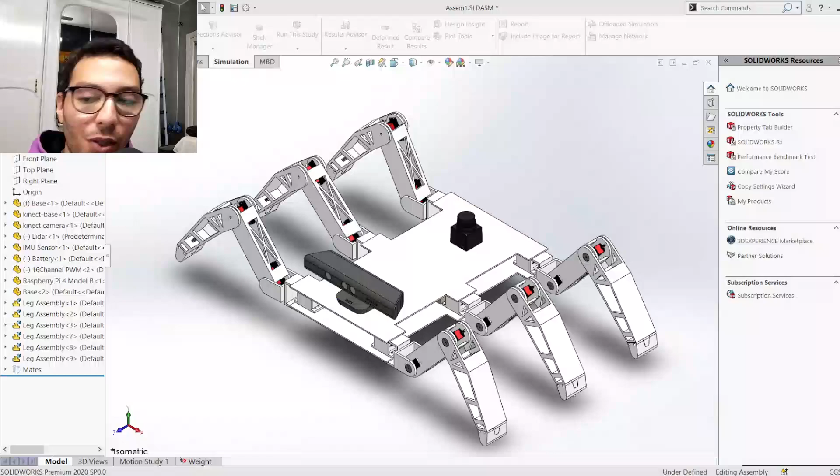This is what we stopped at last time. And from now on, I'm showing you the leg as well as the body we're gonna adjust. First of all, let's go to the leg.

So, in order for you to use a simulation in CAD, here's something that you need to know. Remember last time when we did fixtures for everything? So let me open another file to show you the difference. This is our actual leg that should happen, including the servo motors and everything. But each servo has its horn, and we have our ball bearings at the back. So this assembly contains everything.

If we do like this, this can move, this as well, and this. You got your 3 degrees of freedom in the leg. But this, as you can see on the bottom right here, it says underdefined. So if a system or whatever kind of thing that you're doing is underdefined, you cannot simulate it. So underdefined means it can move, as obviously stated.

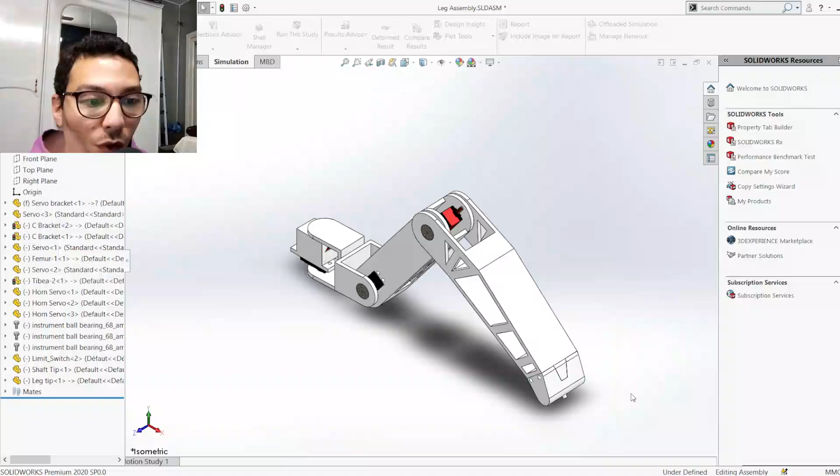But if you want to simulate something pushing the leg, and you want to see if the leg will handle it or not, logically speaking, if it can move, then if you apply some force, it will move. So it won't tell you if it can handle it or not. If you want to see if something can handle a certain stress or a certain force, you want to hold it down and try to bend it, try to twist it, try to force it, do something to it while it's stable or while it's standing still or fixed somewhere.

So in order for us to do that, I had to go right here and fix everything. As you can see on the left side, everything is fixed. The horns, I removed them because a couple of things with the simulation don't go well. I'll explain it. Give me 1 second, I'll show you. So if you go back here and we hide this, let's hide this as well. See, this servo motor, it has some gears. So the gears are very thin, to the point that this is the most thin part in the drawing.

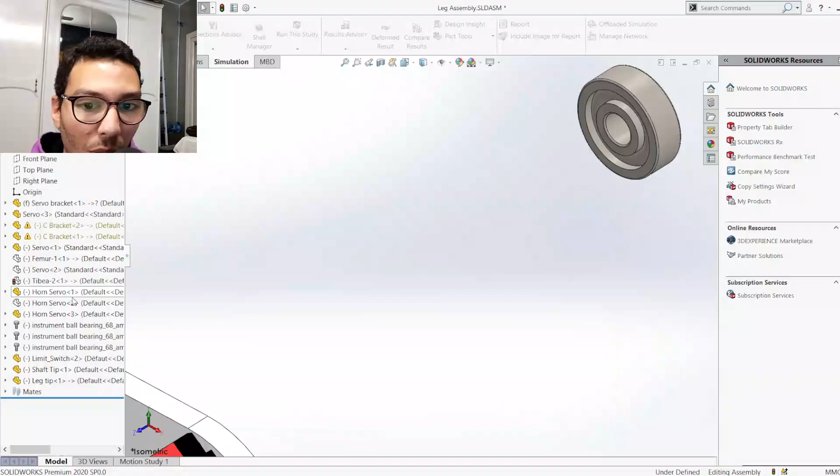As well as if we hide this and this, but get back our horn and look at it from the inside, it's also geared to match the servo. So these things are super thin. You see these drawings, the teeth of the gear? Whoever drew this, I got this from GrabCAD by the way, as you saw from the previous streams. Whoever drew this, it's amazing.

It's great for drawing and for me to fit things together and simulate it as what should happen in real life. But that is a problem if you want to simulate, because if we go back to our simulation, let me just put these things back. Alright. Cool. So let's go back here.

Now, if you wanna simulate something, first, as we said, number one, we're gonna fully define it as shown on the bottom right here. Now, the reason I left the horns out, because if we start a simulation, here's how to do it. On the top left, let me see if you guys can see that. There you go. So, on the top left here, it says new study. You're gonna go to this tab, simulation. As you can see, I'm hovering over it. Simulation, and then on the top left, you're gonna click new study.

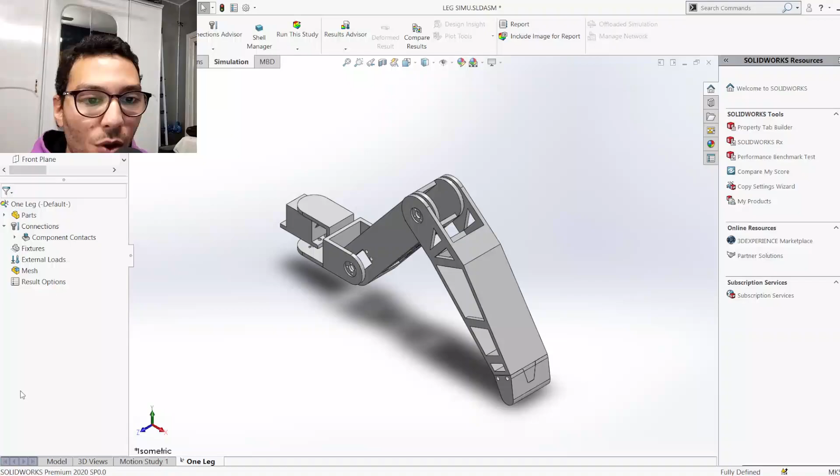After that, you're gonna name it whatever you want. It's a one leg simulation, so I'll name it one leg. Doesn't matter the settings down there, just totally ignore it. So now you are on a different tab on the bottom here. Instead of the model, instead of the 3D view or a motion study, that's not now at all, but this is going to be a fun part. Now you have another tab called One Leg.

So the One Leg is the study that you just initiated, and here you can adjust things that will not affect the main model. So if I go to parts, I can add parts, I can remove parts, I can, let's say, change material for something here, apply or edit material. I can do all that without affecting the actual model, the model here. This is not going to be affected.

So when we want to simulate, we go over here, and here is the tricky part that we needed to remove the horn for. Here you have to mesh this. So what a mesh does is basically you're breaking down these parts into very fine particles, so it can apply force to it, and instead of treating this entire thing as one block, it treats it as very tiny triangles.

So if you go to mesh and create mesh, here, mesh parameters, you see, you tell it what the triangle that it wants to consider is. So let me just put myself back here.

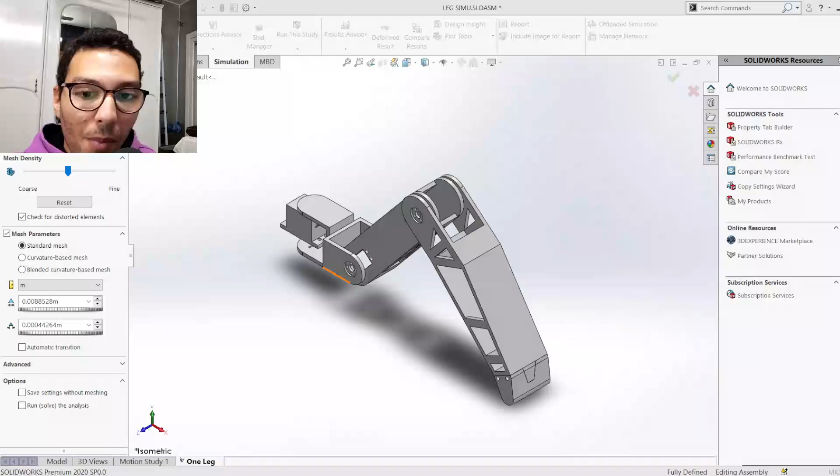Okay, so meshing here, as you can see, it deals with meters, so we're gonna have it as millimeters. Now we want to mesh this to be 3 millimeters. That's a nice thing to have, because here, this is the issue with the horn. You see, remember when I was drawing this and we said this is gonna be 5 millimeters thickness.

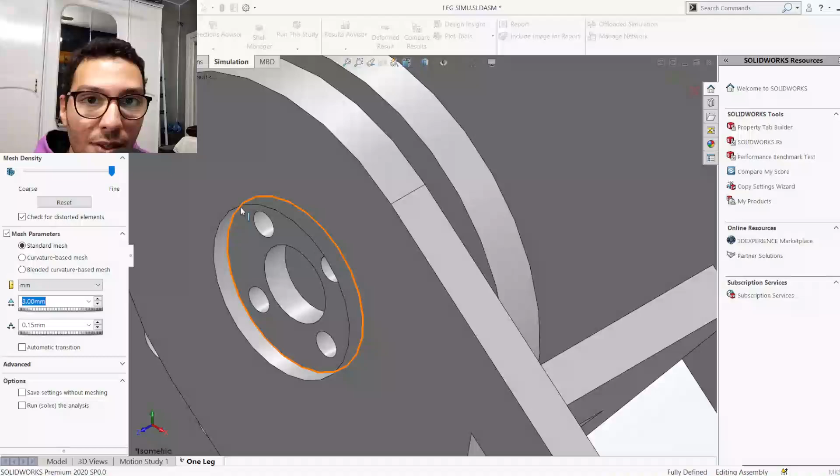If I had it as it was before, 8 millimeters, it wants to divide this into small triangles that are 8 millimeters thickness each. It cannot do that because it's 5 millimeters thickness only. It cannot put a triangle that's 8 millimeters wide inside a 5 millimeter part. Now, the issue is, the finer you go, the harder it is on the device to handle it. That's why people usually go somewhere here, which is, they just reset it, it goes to 8.8, and the tolerance here is like half a milli or something.

But basically, if I try, let's say, doing 3 millimeters, as you can see, it goes to fine instead of coarse. So even if I go this fine, if I had the horn or the servo motor present, it is way too thin. It is even less than 1 millimeter. It might even be less than 1 micron, which is like times 10 to the power negative 6. So now let's try doing it on 3 millimeters and see what happens.

It is trying to simulate, but it's dying a little. I mean, it's trying to mesh, not simulate, but it's still dying a little. So I'm gonna close this actually, because I have 3 SolidWorks tabs open. Yay! It did the triangles. First, I'll show you guys how it looks, but let me close this first. Oh god. Let's also close this until we need it. Oh my god, it's dying on me. Okay.

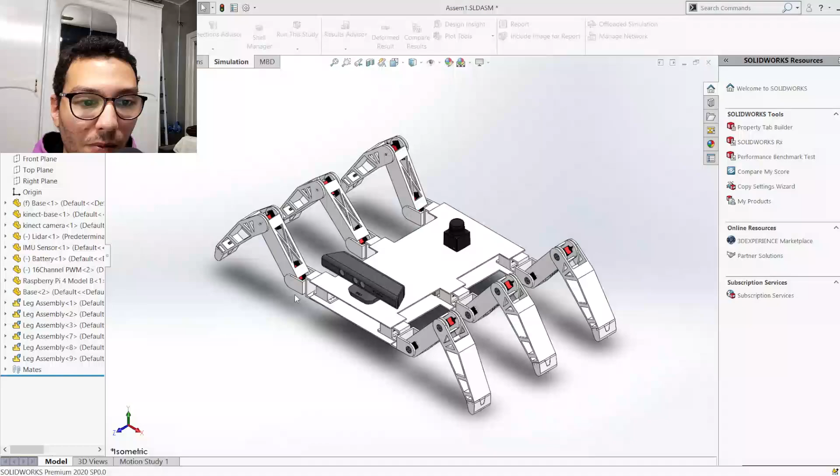Alright, now back to our simulation. If we go back to our one leg and redo the mesh. So create mesh. We did it as 3 millimeters. Now let's mesh. Alright, so now you can see what it wanted to do here. So it wants to put triangles inside of here.

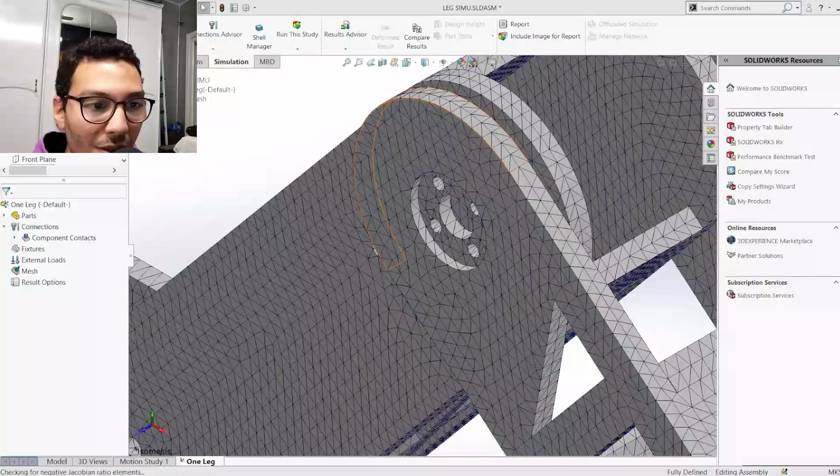As you can see, we couldn't have done it with 8 millimeters because this thickness is 5 millimeters, as well as all of the grooves, everything here. This entire thing is 5 millimeters, and this is a part of it. So let's say that this was like 3 millimeters or something. Inside of these are all 3 millimeter wide triangles, and so on. So it treats it all as small triangles all beside each other, and then we do this.

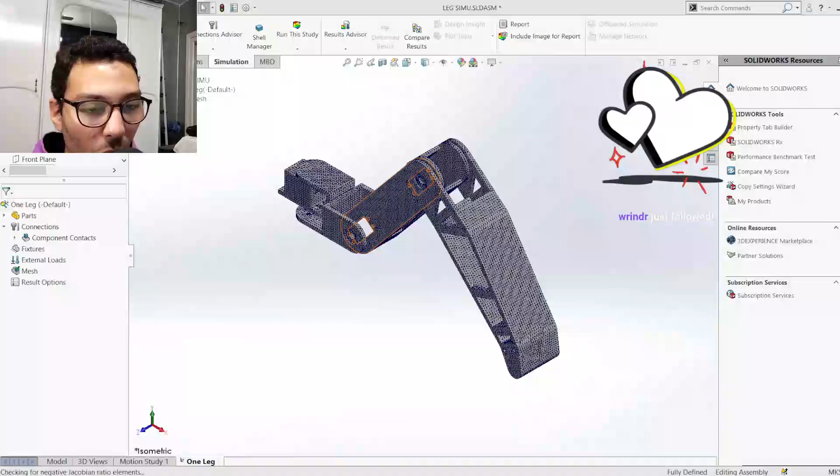After you mesh, you want to tell it where it's fixed. So this robot is fixed as this bracket has a servo motor inside of it, and this motor is attached to the body. That's what's causing the weight, that's what's causing the force. But this entire thing is stepping on the ground, so it's fixed on the ground here. So if we want to fix it, you're gonna go to fixtures at the top, or at the bottom here you can see fixtures. So we're just gonna go to the top here and say fixed geometry.

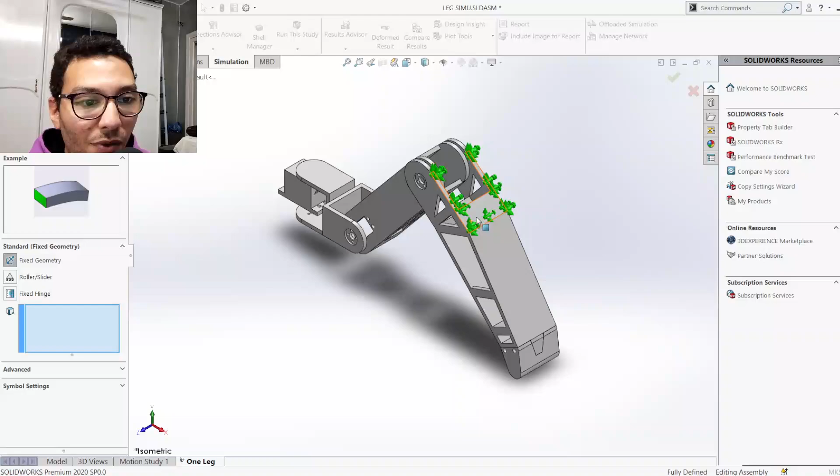Alright, so we want to fix it at the bottom as we said. As you can see, if we hover on something, it tells you that this face is gonna be all fixed, meaning it's all on the ground or it's all clamped or glued somewhere. So as we said, this is gonna touch the ground here. So this is our fixture. This entire body and leg is gonna hit the ground here. And if you push the ground, it's not gonna move. So it's like it's fixed. And let's say yes to that.

Now, technically, what we want to do is apply our force. As you can see at the top here, external load advisor. You can apply a force, a torque, so it's like twisting something, or some pressure, apply gravity itself, or external load advisor. It's like a tab that will show you how to deal with these things. A bearing load, centrifugal force, temperature, and so on.

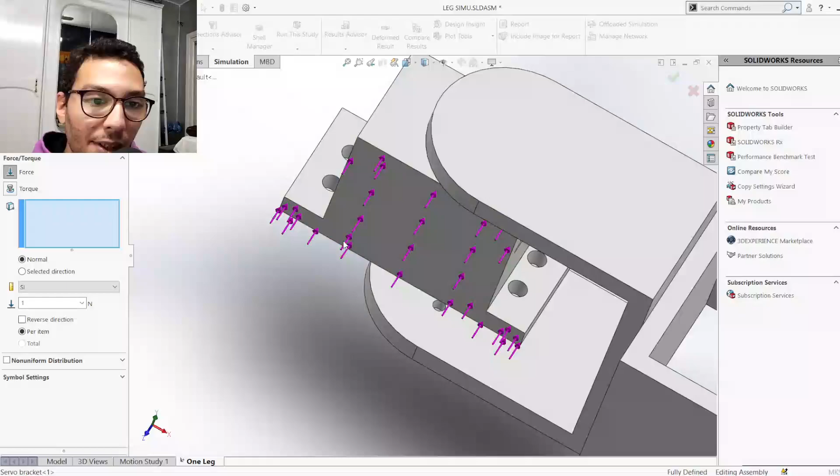So we're gonna go to force, and then here is the tricky part. Technically, this bracket is held onto the servo motor, which is held onto the body. If the body wants to fall off, so the spider is standing on its legs here as we fixed it.

If the body wants to fall off, it will take the servo motor with it, as well as the bracket. So it's pulling this entire leg from the screws here. So this is what's causing everything to try and fall down. But if I apply the force inside the screws, sometimes it doesn't work. So we're gonna apply it around here. Let me show you first how it doesn't work, and let me show you how to fix it.

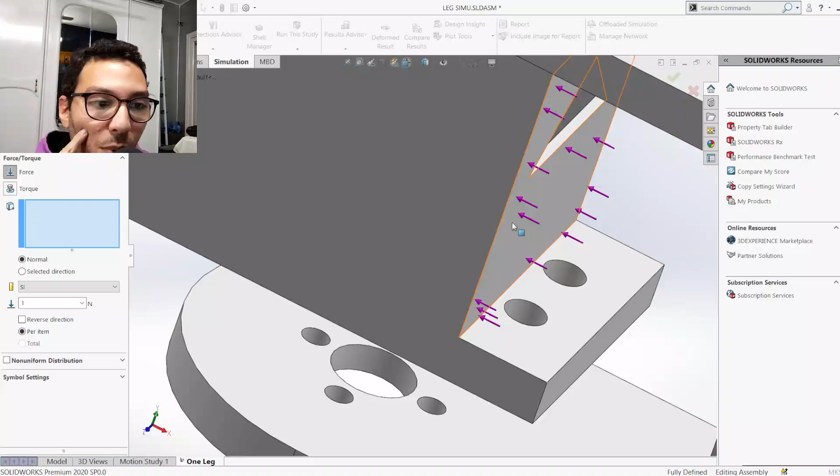As you can see, it does the force perpendicular to the surface. So if we do this, it's perpendicular to this surface, and here it's perpendicular to that, and so on. So here it's gonna be perpendicular to the circular surface. Now we don't want that, because the screws are not hitting the sides. The screws are taking the entire thing and falling down with it. So we can click inside here. So we're gonna click all 4 places.

Now you want it to be looking down. So first of all, this is how much force is applied. So 1 Newton is like 1 kilogram of force. So for now, we say we're gonna do the entire thing 3D printed. If it's all 3D printed and we go and check the weight, it's gonna say 6.5 kilograms, including all 6 legs, all our motors and everything.

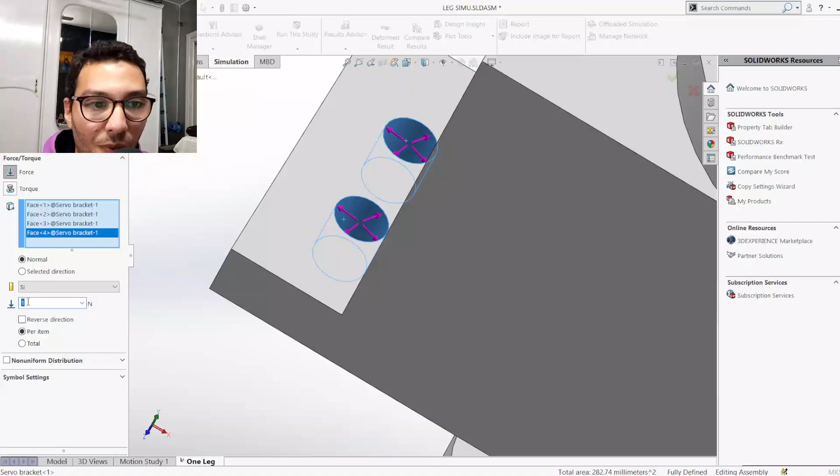But the legs are not trying to take the body and fall. It's just the body affecting these holes. So if we remove each leg weight and just count the body, each leg is half a kilogram. Half by 6, that's 3 kilograms. So the rest of the body, including all components, is 3.5 kilograms. So worst case scenario, in order for this robot to walk, it's gonna have 3 legs on the ground and the other 3 up in the air trying to move. That means our 3.5 kilograms have to be supported by only 3 legs, not 6.

So let's say, for example, we hit a number of 4 kilograms distributed by 3 legs. So we're gonna do 4 divided by 3. So each leg needs to hold 1.3 newtons, which is like 1.3 kilograms of force. Let's say worst case scenario, each leg needs to handle 1.5 newtons. So we're gonna do that, and then we're gonna go to the distribution. Let me just find it. I forgot where it was. Actually, that's not per item. That's total. 1.5. That's first of all.

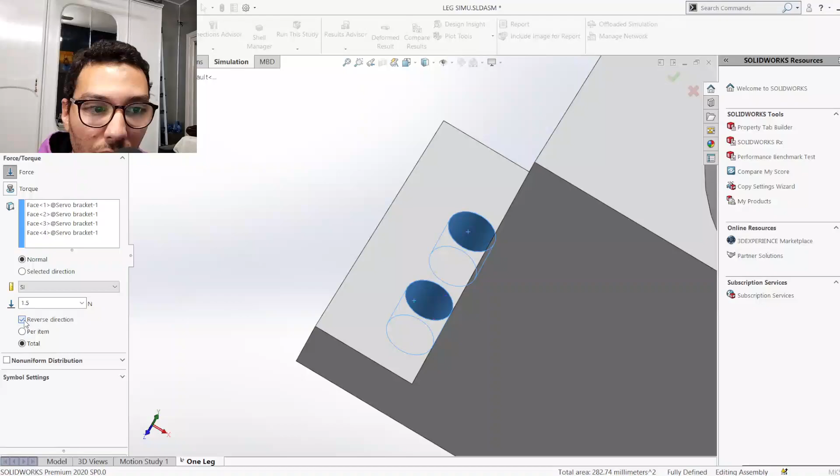And selected direction. So it's inside here. Now let's click this face because we want it to be facing down. We want the force to be like the screws on the holes. So here's the hole, and this screw wants to take the body and go down. So we want the force to be perpendicular here. So we're gonna click this face, and you see these: along direction 1, direction 2, direction 3. So these are your X, Y, and Z according to the face that you just clicked.

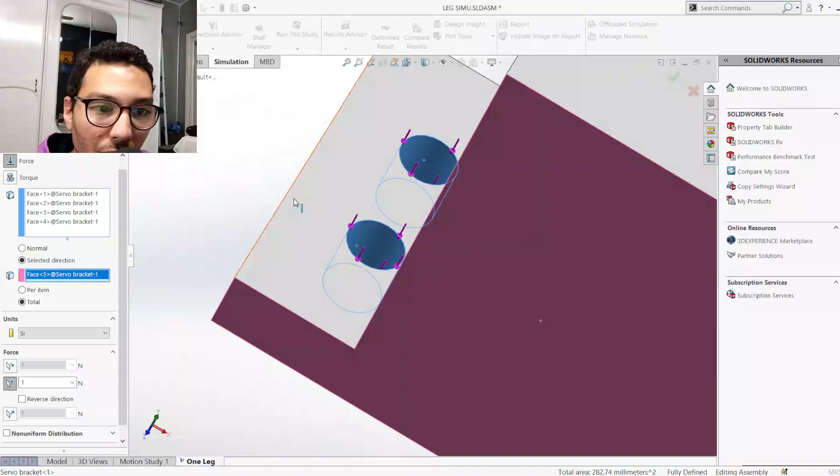We can click that face and see what happens if we click this. So you see, it's going parallel to this plane. That's not what we want. We can shut it down as well. Click here. Yep, that's what we want. You see, it's going down. It's taking the force and going down. So this is exactly what we want. So we're gonna say yes, 1.5 newtons in that direction.

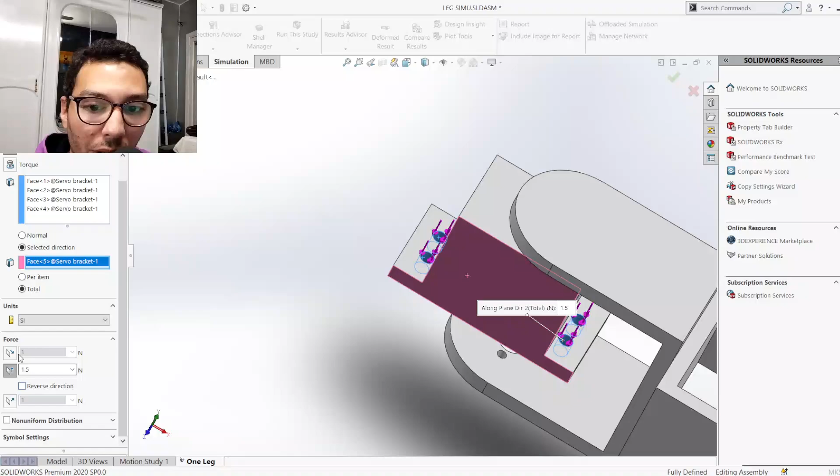And it's total, not per item. So not 1.5 newtons per hole; that would be 6 newtons. That's not what we want. And we're gonna say yes to that. Now, you did your fixtures. Everything is fully defined. That's the most important part. The second thing you did is the fixtures, and then you did the forces. Now you're just gonna go up there and say run this study.

Okay, so it says material not defined for one or more items. Let's check which material is not defined. We can go here. It's probably the bearings, right? So these all say SW ABS. That means if I go and apply or edit material, I'm gonna find it to be ABS already because I made sure that everything is ABS. Yep, so it is all ABS, and this yield strength, actually it's a good thing that we opened that. So it wants to calculate the forces applied to this material, right?

It needs to know the yield strength of this material, which means, for those of you who do not know these things, if I bend this material, how much force can I apply to this before it yields, or before it deforms, meaning before it bends and cannot go back to its former position?

So it's like you're bending a metal object, or let's say a plastic object. If you're playing with a plastic toy and you just bend it and it goes back to where it was, that has a high yield strength, or you didn't apply enough force to break its yield strength. So it needs to know what the yield strength of this thing is to know if the 1.5 newtons are gonna actually bend it or not.

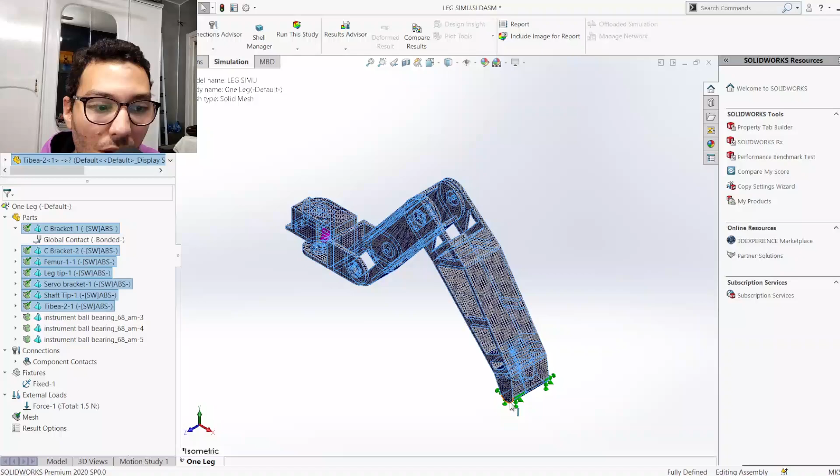They all need to be the same material. Let's say acrylic, as we said. Apply. Medium high impact acrylic, as we said. So I think these bearings are the issue. Let's do these, because they have no material attached to them.

Now, yeah, we can make it alloy steel. I'm not really sure what bearings are made of. Let me actually check, just double check. Oh, chrome steel. Okay. Is there chrome? Yep, chrome stainless steel. Made of that. Apply and close. So now you got your materials. Now let's try to run this again. Run this study.

Fair warning, you need a good PC to do these things, because as I said, you don't want everything to overheat or not work properly. The more you put materials into this, so this is like dealing with a couple of parts here. Oh, it finally started. Cool. So we're just gonna put that to the side so I can explain things here.

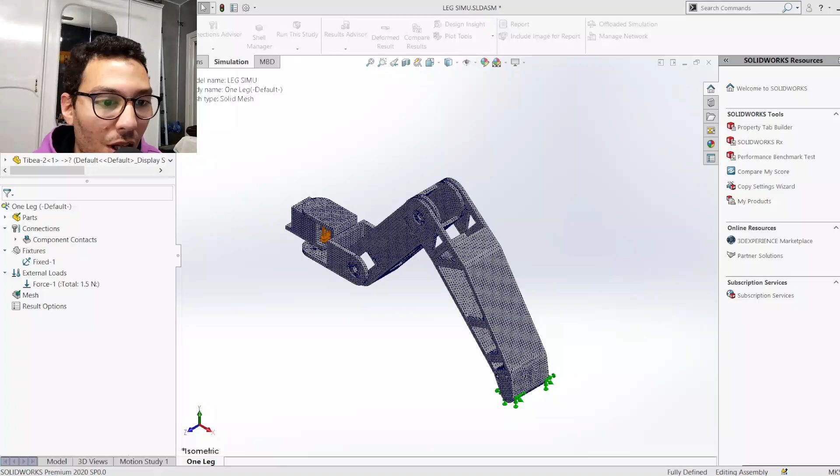So it says numerical difficulties. The iterative solver stopped. Please check the boundary conditions and such. So we're gonna go to the forces that we applied, right click it, edit definition. And now, instead of applying it to the holes here, here, here, or here, we're gonna apply it to the thing from the outside. These. It might still not work, but we're gonna check it out together.

Now run this study, and we wait. If you cannot see the mesh already happening, you can just right click the mesh here and click mesh and run at the same time. It will finish meshing and running at the same time, and it will show you each one and the percentage of it. Hopefully it goes well.

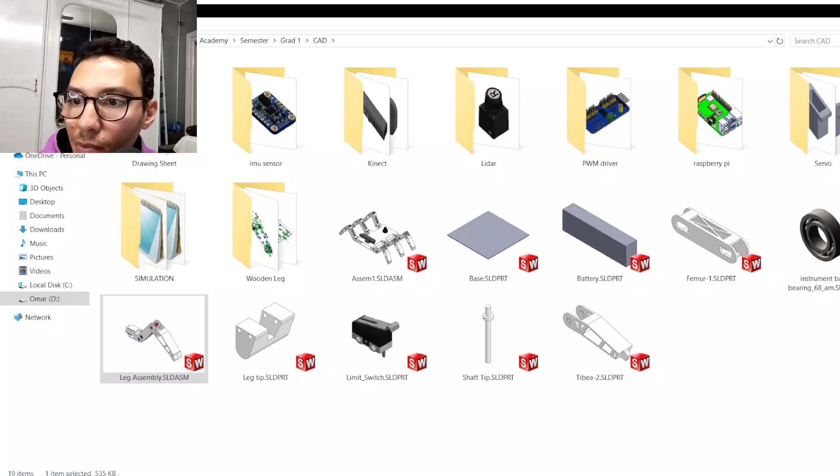I don't think you guys can see the errors that come up to me. So give me a sec to try and fix that. Not that. Ooh. No. Okay, much better. Alright. Let me see why this is not working.

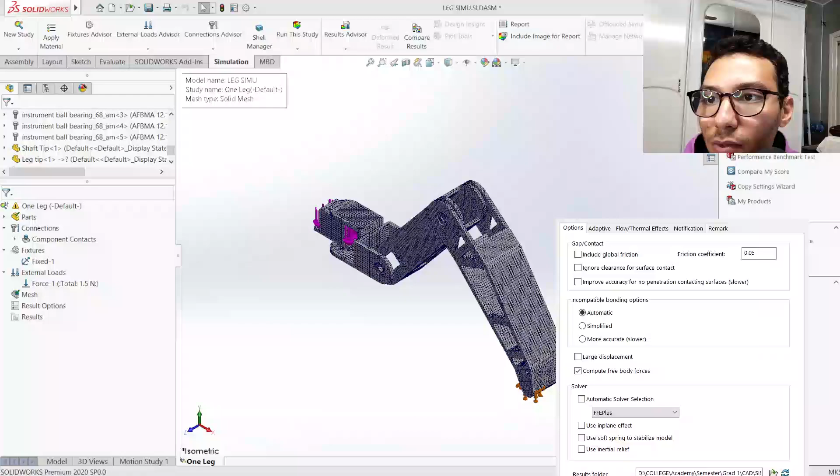So in this static, you can see options on here, incompatible bonding options, and then you'll see large displacement, and then you'll see use soft spring to stabilize model. We're gonna click that, as well as large displacement instead of compute free body forces. Then we're gonna click OK. We're gonna run this study. And remove that.

Okay, it's working. Now let me put myself back. Of course, it's taken much longer, but if it works, then we did what we wanted.

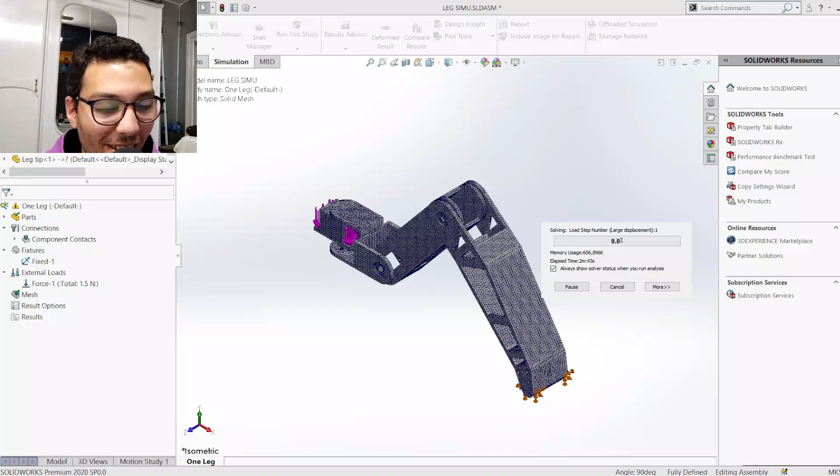Let me actually try to stop this. No, don't save the results, because you're taking too long. Let me do something here. Keep it compute free body, but use soft spring. And let's see what happens.

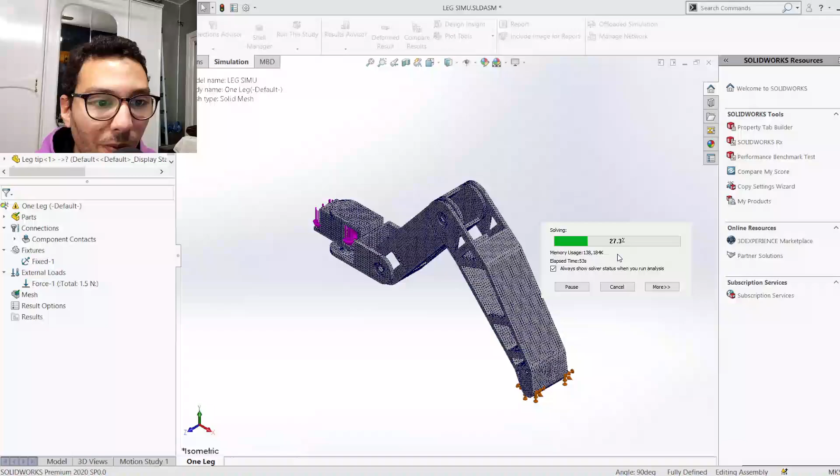Hey, excessive displacements were calculated. If your system is properly restrained, consider using the large displacement option to improve the accuracy of the calculation. Otherwise, continue with current settings and review the cause of these displacements. Click yes to solve with large displacement, no to solve with small displacement. First of all, we're going to do the no and solve with small displacement and see what happens.

Alright, so it finished simulating, as you can see. Now let's do a couple of adjustments that will help you guys understand these things better. So here on the stresses, let's right click and go to chart options. It should switch to this screen right here. We want to see the maximum stress and where it is, and then we want to do this to be

normal. As you can see, instead of scientific, have it to be float, and then in the definition have it to be, instead of Newton per meter square, which is Pascal, we want it to be Newton per millimeter square, which is megapascal. So these numbers can go down a little bit, then click yes, and now you can see that here we have the maximum stress of 0.89 megapascal.

So in the displacement here, we're gonna go again to chart options. Again, maximum annotation, we want to see the maximum displacement. Also floating here, we want to see it in millimeters as it is. And then double click it so you can see actually where it happened.

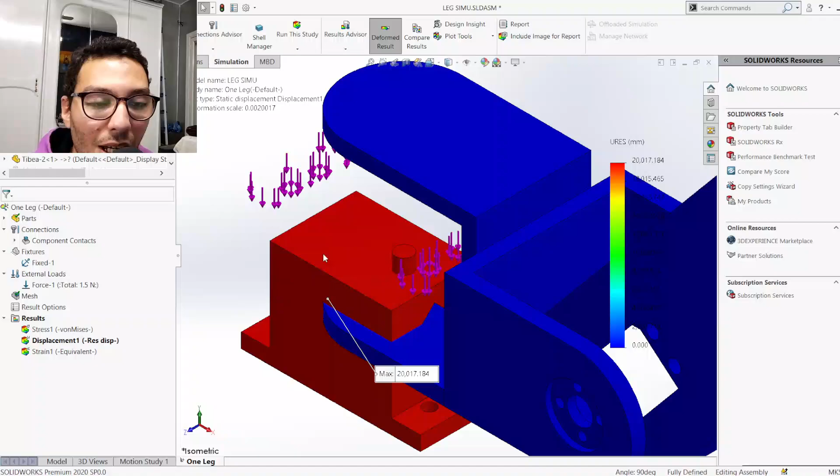But let's go to strain as well. Chart options. Floating. Show maximum. In the definition, there's nothing to click, so we're gonna keep going. Now, the entire reason we're doing this simulation is to see the factor of safety. If you're more than 1, that means you're not gonna break.

If you're less than 1 factor of safety, meaning this thing or whatever material you're using, if it gets hit with that kind of force, it is gonna break 100%. So, as engineers, we want to stay above the 1, but as good engineers, we want to stay above 2 or 2.5 to make sure 100% that you are in the safe zone in case something more than what you predicted happens to the leg or to whatever material you're doing.

So if I do a factor of safety and it shows, let's say 1.5, I am above the 1. My material is not gonna break if I get hit with 1.5 Newton force, if the body is that kind of weight applied to this kind of leg and so on. But if anything more than that happens, I do not know if my material is going to handle it or not, because I did not simulate it properly.

But if I stay above the 2 or 2.5 factor of safety, and let's say 3 newtons hit my robot, I'm going to be safe because it's much higher than the one that I'm working with. So we're working for 2 factor of safety or 2.5 if we can make it. And let's see where we can see that.

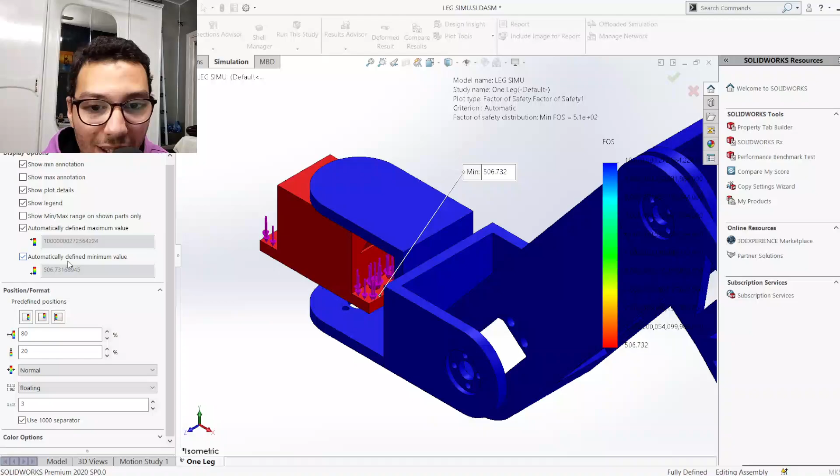So I'm supposed to be within the 1 to, let's say, up to 3 factor of safety. But this makes no sense. Anyway, we're gonna do something still. If you're from 1 to 3, as I said, you would want this chart on the right here that says factor of safety 10 million gazillion something. That's the maximum. That's why everything is blue, because they're hitting that. But my maximum does not need to be 10 gazillion. It can be 10. But it's not going to be 10 because my minimum is even higher than 10.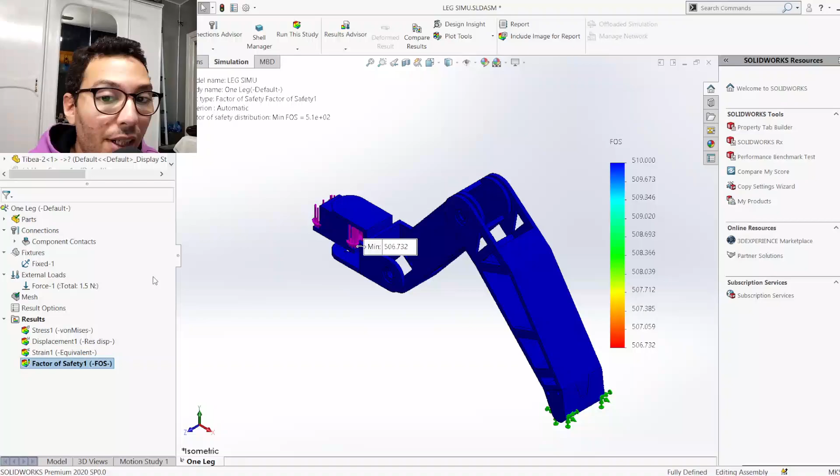So since it's rated, we're going to do 510 just to stay above the 506. Now, 506 itself is the red part, and up to the blue part, which is 510. Now, let's say yes to that, and let's try to fix why this thing is not working. We can do it in a really simple way. It's not the right way, but it is a simple way. So, for the sake of simulation, we're gonna do this.

We're gonna mark everything. We're gonna apply our material. Instead of acrylic, we're gonna have it to be steel. Where is the steel? Yep. We're gonna have it to be AISI 1020. And apply. Of course, since we changed material, we're gonna re-mesh and re-run. So right click on the mesh, it will say mesh and run. That's what we want to do, and let's see what happens. And if that doesn't work, there is still another fix. Again, not the right way, but it is a way.

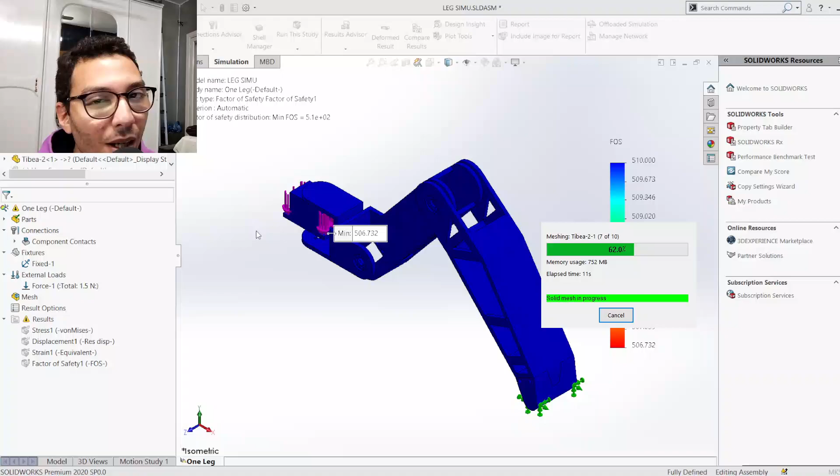The mesh is done. And now it's running. It will ask us the same question, by the way, large displacement, yes or no. Yep, there it is. Let me show you guys. Excessive displacements were calculated in this model. If your system is properly restrained, consider using a large displacement option to improve the accuracy of the calculation. Otherwise, continue with current settings and review the causes of this displacement.

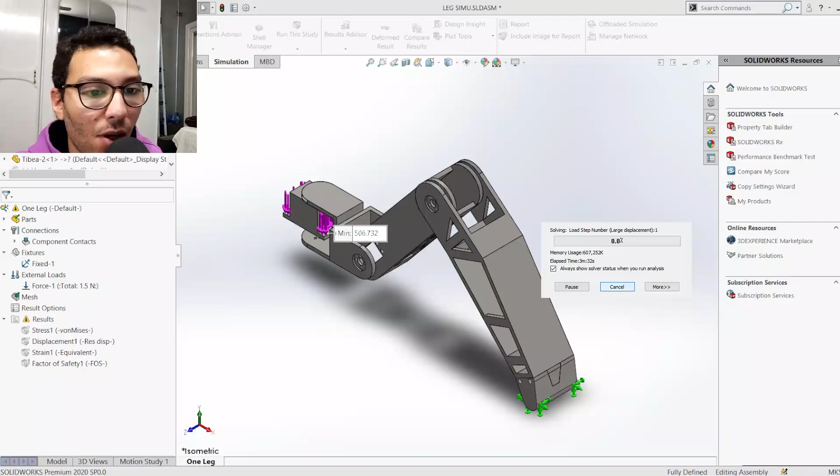So this time, let's go with large displacement calculations and see what happens. Okay, so this is actually starting to really heat up my laptop. So I'm gonna stop this here and do the other solution. We're gonna take that force, edit it. Instead of being on these faces, it's gonna be on this face.

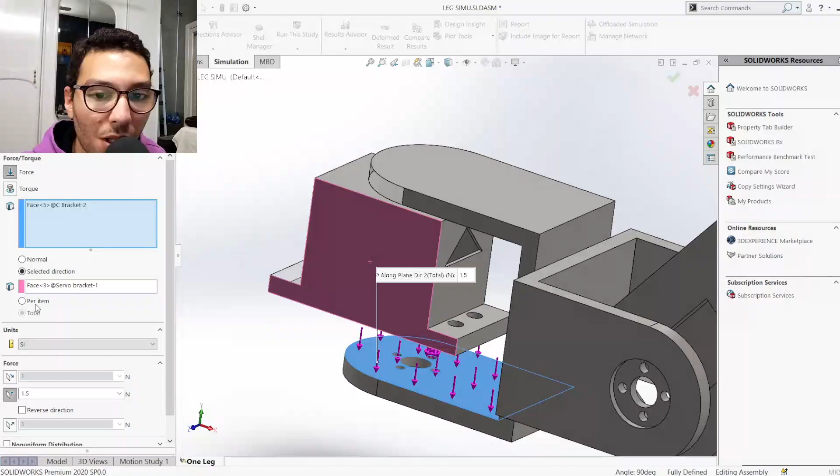So here's what should happen. Once this bracket tries to fall, it will push this through these holes. So it's basically pushing this here. So we're gonna do that. We're just gonna delete that from there. We're gonna push it from here for the total of 1.5 newtons as we were, and run. That's the second solution that I was talking about.

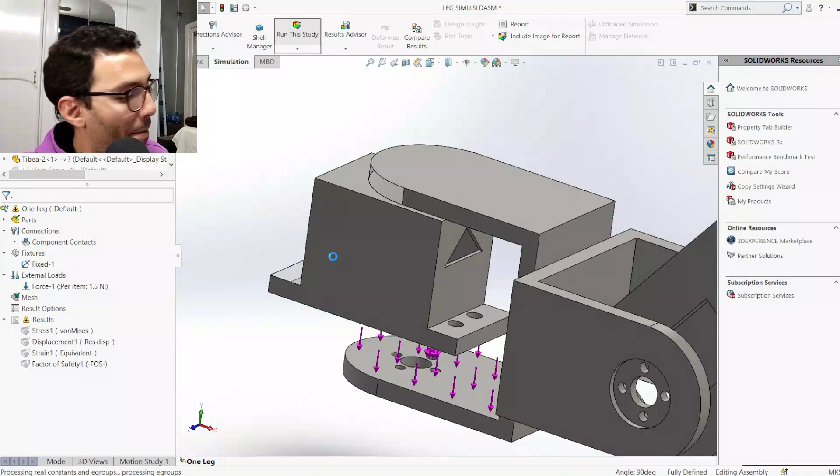You know the funny part? I did the first solution before stream, on my free time actually, and the simulation went great. It actually simulated without any issues. So I don't know what's going on right now, but I faced this before, as I said, and there are a couple of solutions for this. But the first solution worked for me fine. Not really sure what's wrong here. Are you guys the issue?

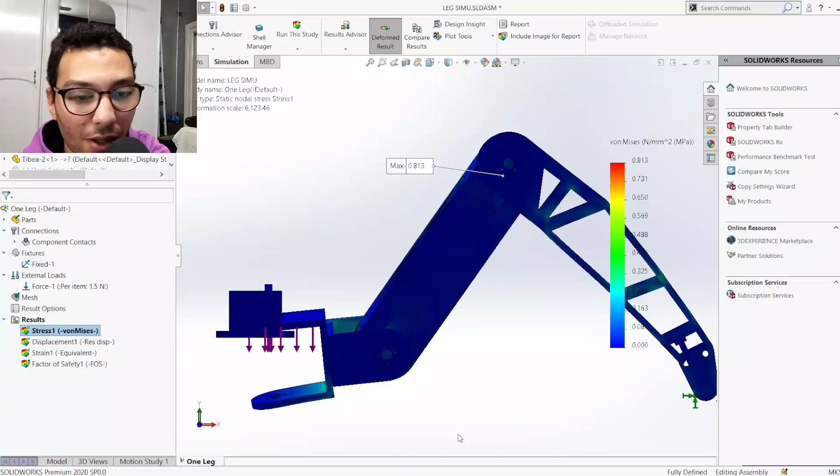Well, it's done. So 0.8 megapascals here. Don't worry about how it looks, but at least when something moved, everything else moved with it. So if you see from this angle, when this moved, then this moved. So this connection is correct. The not correct part is that still when this moved, it didn't take this down with it. So the issue was between this part and the C bracket, so the servo bracket and this bracket. That was the issue. But if we go to our factor of safety, we can see that it's perfect.

212. And the reason being, this is all steel, so that's normal. But let's also see the displacement, by the way, that's 0.007 millimeters, so that's almost nothing. Don't look at it as it is right now. I knew you were gonna look at this and say, dude, it moved a couple of centimeters.

That's half a meter right there. But that's not what happened. It just looks like that because it's not fixed in anything. So the simulation just falls to the abyss here. But basically, it just moved 0.007 millimeter as stated here. This is the maximum it can move.

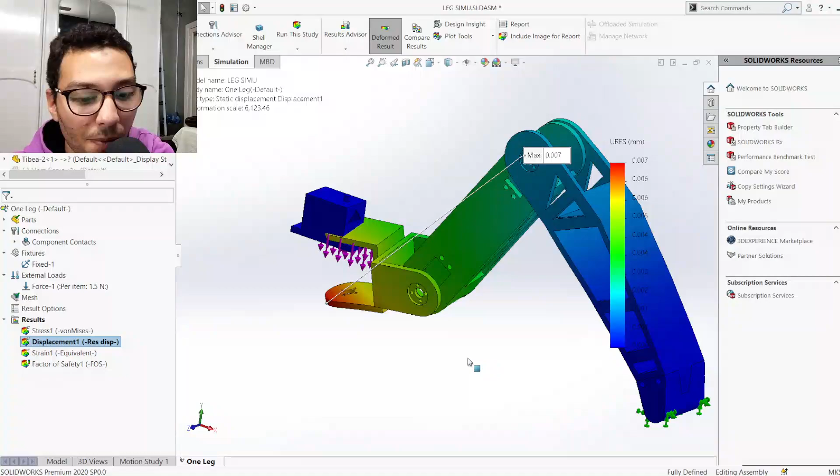But we're gonna do something here. Since it's starting to work again, we're gonna go back to the acrylic and see what happens, because it's the closest thing to the 3D printing or like woodworking or stuff like laser cutting as 2D stuff. But let's see what happens if we go back to it. Where was it? Acrylic. Yep. Apply to all. Close.

And run. But first, let's go to study properties instead of large displacements. Since this is a 0.007 millimeter movement, it's not going to be a large displacement in that case. So that's why we can go back to our normal calculations and run this study. But as you can see, it is fixable, not the right way, but if you face an error, you can fix it just like that.

If something is not working properly, or if one part is moving without being connected to the other parts, I'm 100% sure that my fixtures are correct, by the way, because I did this before, as I said off stream, and I did this multiple times until I figured out how to fix it as I'm showing you guys right now. But basically, if it's being wonky for any reason, if it is your fault or not your fault, you can just fix it like I just showed you right now.

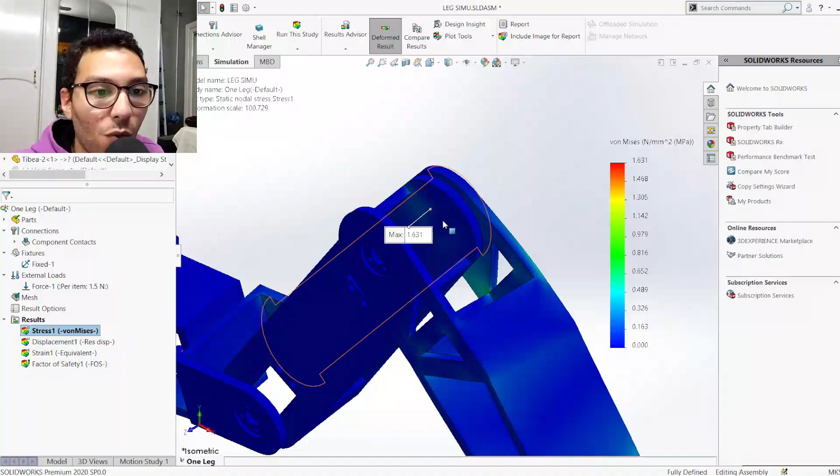So this is the stress analysis. Now we have 1.6 megapascals applying here. Now if we go to displacement, it moved 0.4 millimeters, so less than half a millimeter movement, and it's not even gonna move that half millimeter. It's moving because it doesn't see anything connected to it, but this is connected to the servo bracket, which is connected to the body.

So it's like it's telling you that the entire body is just as it's moving, which is normal, like its legs going up and down so the spider can move. It goes down half a millimeter. As it moves, it's not gonna keep its entire body leveled. It's gonna move and the body's gonna take the legs and move a little bit, so half a millimeter is basically nothing.

And now if we go to the factor of safety, which is the entire reason we're doing this, you're gonna see it to be perfect. It's more than 1, but it's not great, because as we said, it's from 1 to 3. It shouldn't be this high. It's this high because I made the entire thing out of acrylic, which is not what we're doing. We're doing ABS, but we don't have the yield strength of ABS.

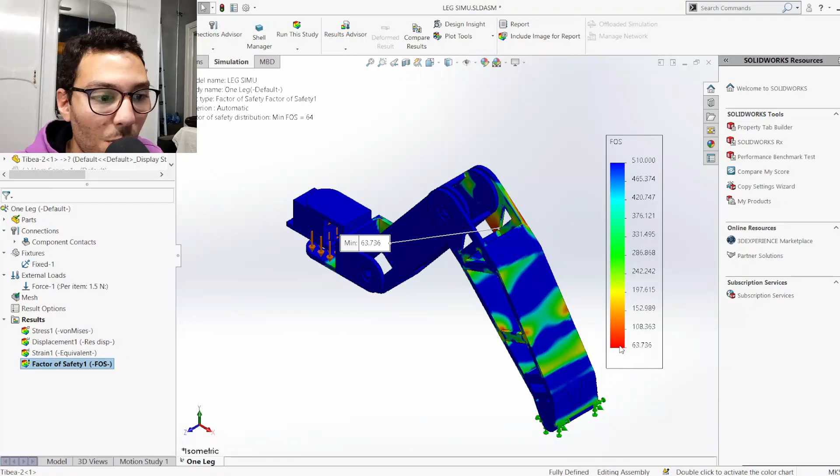But we can readjust the coloring here. It's colored like that because its minimum is 63, which is what we caught here, that this is going to be the weakest part. If it breaks, it's gonna break from here, but it's not gonna break because it's way above 1. And the highest is 510, which makes no sense at this point. So we're just gonna go to chart options and say 65. So we're getting closer to what we want to see, which is the 1.

Normally, if it's from 1 to 3, as I was saying, you should have your maximum be 10. So your factor of safety is from 0 to 10, or whatever minimum that you get to 10. So we're getting there, we're getting closer bit by bit.

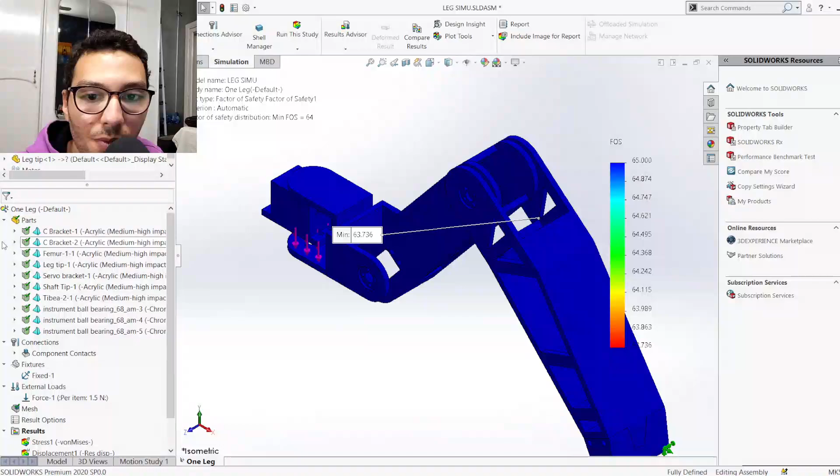So give me a second, I'm gonna check if I'm able to find the yield strength for ABS, put it in manually, and actually I think I did that before. Let me recheck that here. Let's do that. Mark all, edit material. Let me show you this, guys. This is a cool trick to have.

Let's see here. Okay, so in these materials, if, for example, what happened to us here, you click on ABS, oh, there's no yield strength, but I want the exact same parameters, I just want to edit this, you can just copy it. So right click, copy, and then go down to your custom materials and paste it somewhere and edit the yield strength yourself, as I did here.

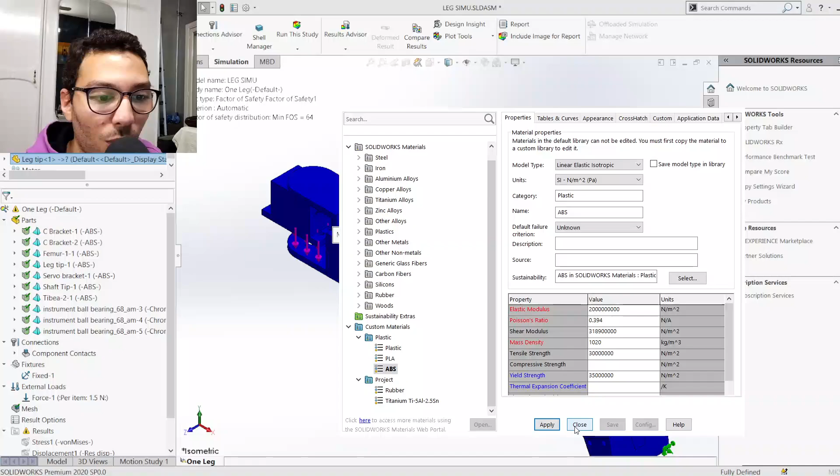So we're gonna choose this, and this is also for PLA, and this is normal plastic. I didn't put the yield strength because I never used it. This is rubber stuff for the tip, but we're gonna go for ABS and say apply here. This is our custom made ABS, so let's run this study.

Again, as I said, I already did this before off stream, but it was weeks ago, so I forgot how to do it, and I forgot that I actually had the ABS yield strength in the system. But basically, I just went online, checked what the ABS yield strength should be, what's the norm, what's the average, and then I found that number.

I did this average myself because I found it to be from 30 to 50 something. So I had it as 35,000, as you can see, or 350,000. I don't remember the number that we just saw, but basically that's what I did. I searched what the ABS should have as a yield strength, and I took the average of all the findings that I had and then entered it in the system. And now we're gonna see what actually should happen in real life.

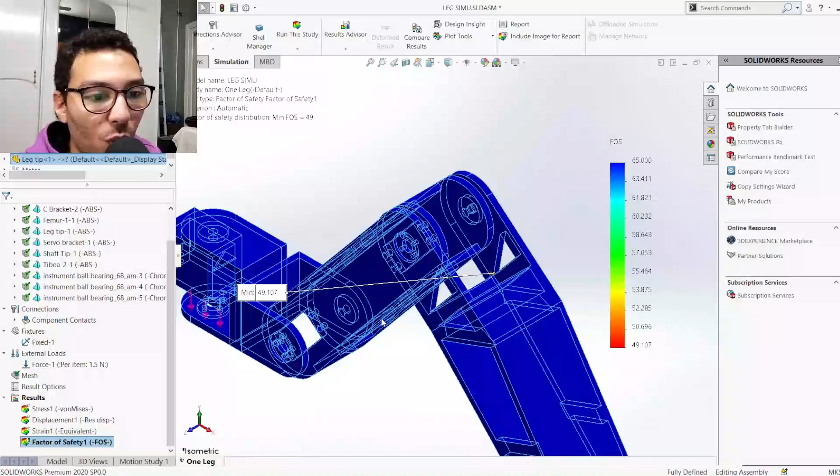So in real life, we should have 1.784, so approximately 1.8 megapascal force here. Our factor of safety should be, drumroll... Let's go. 49. Cool. So it's getting less and less. And our displacement also around the 0.5 millimeter. So that's actually great.

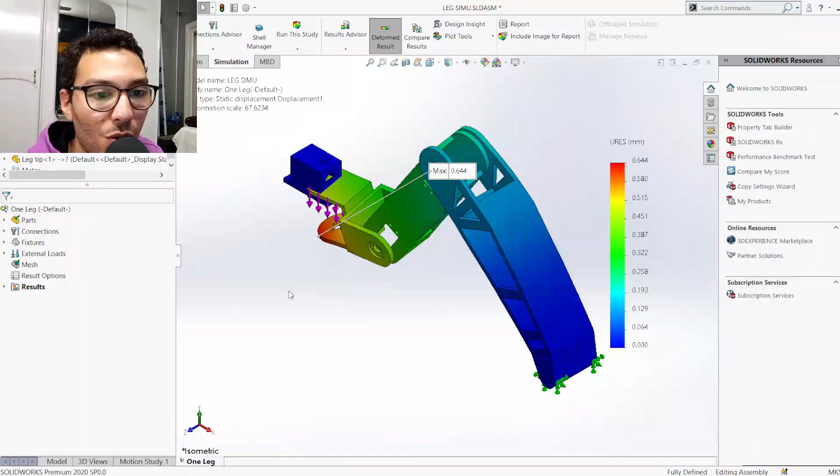Now, this is how you simulate the leg. So I'm gonna continue this offline actually, but let's go check the body out. Basically, I just wanted to show you guys how to do the simulation, and I'm glad actually that I encountered these issues to show you guys the fixes for it. But this is basically what you do to simulate the leg. But let me actually show you something very cool. Let me transition to this.

So when we found out these things, basically simulations and 3D printing and those numbers that you saw, we went out and asked how much would it cost us to actually 3D print this, and the number was humongous. So we wanted to do our kinematics for the leg. I'm gonna do a little bit of a reveal here, something that you shouldn't see now, but I'm gonna show you anyway.

Alright, check this out. So we wanted to do the kinematics of all of this, which means that we wanted to see how the leg moves, how it goes out of the ground, how each servo moves, the power electronics of it all. So we needed to actually put it on a leg to test first before we 3D print anything and pay a hefty price. So we did a 2D model for it all and printed it as wood, as you can see. Ta-da! This is the leg! My leg!

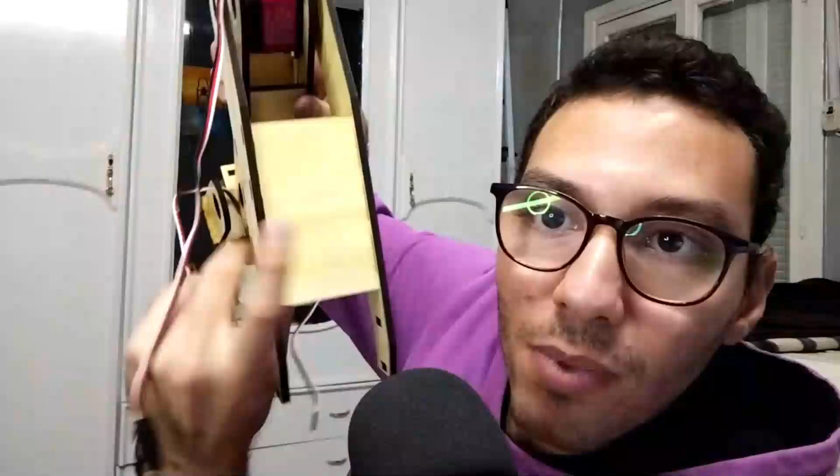So I don't use any screws to put these together. This is just built here, so it can go in, and it's made with such high precision by the laser cutter that these holes fit this thickness so that it can actually just go in, and that's it. If you try to pull it apart, you're gonna put a little bit of force into it. It's not easily pulled apart.

And if you can see here, these 2 holes, I made them because building a big part out of 2D material is kind of hard. But these 2 holes are supposed to be where the trigger sensor will be put, so that a circular shaft can be put here to tell the trigger sensor that, hey, I touched the ground, stop the motors, don't force the leg down more than that. But basically, this is where the trigger sensor will be, and the shaft will press from this area.

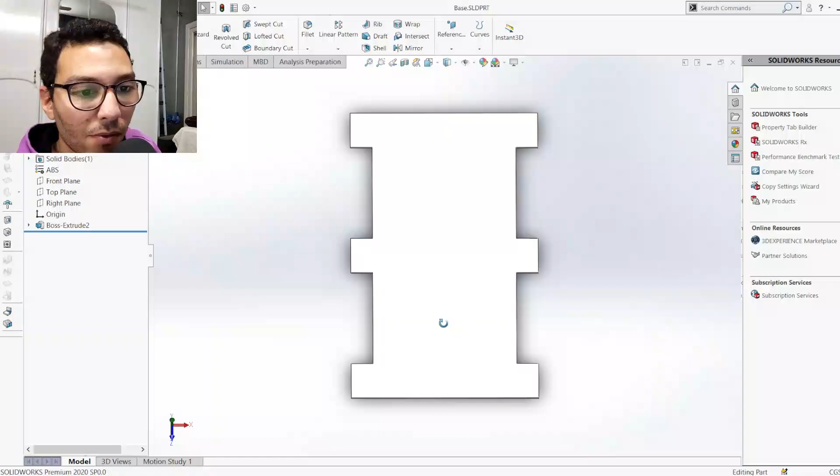As I said, a lot of things are gonna be still adjusted and fit better than this, but for now, this is what happened. And let's go back and adjust our body a little bit, then call it a day, basically. Alright, so in this body, what we want to do is this. Nope. Okay. Let's do this. Let's edit that sketch. And let's have that facing this way.

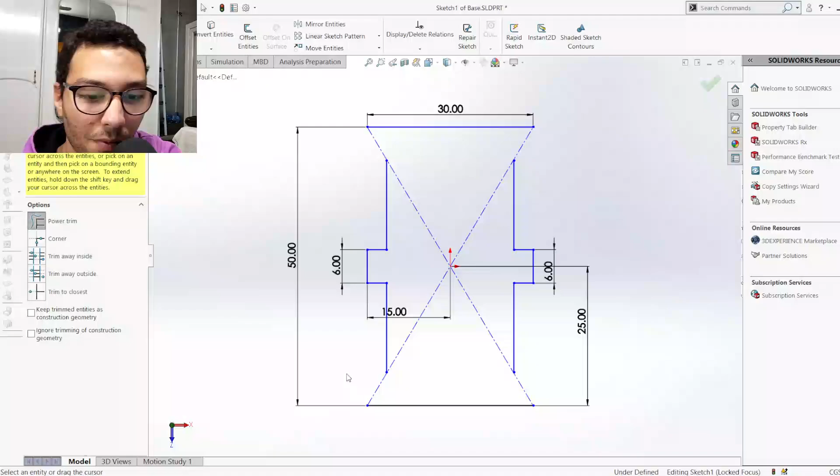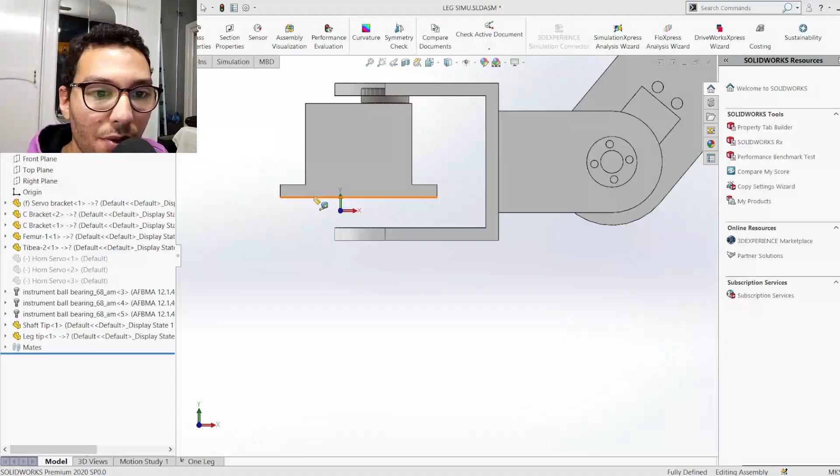All right. Okay. Let me see exactly what I'm trying to do here. Because I have the vision in my mind, I just don't know the measurements. So let's evaluate this. So this is 62 millimeters, let's say 70. So we can have some breather.

So I need this. Nope. Yeah. So this should be 7 millimeters. As well as this. And I'm trying to have it from this side be 6, just like the one above it.

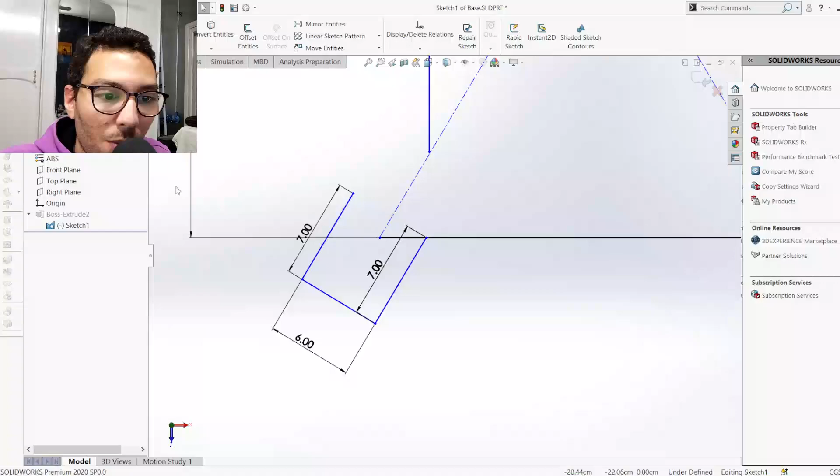Now trying to have this on here. Yep. And then this. And this. Yeah. Trying to have that to be 3. Nice. Okay. Now I want this here.

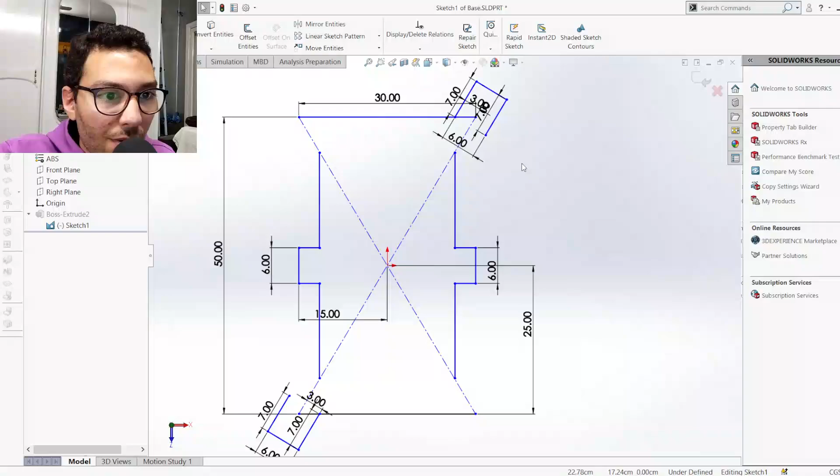Yeah. Let's have it to be 3. Nice. Okay. You're gonna get it in the end. Let me shoot.

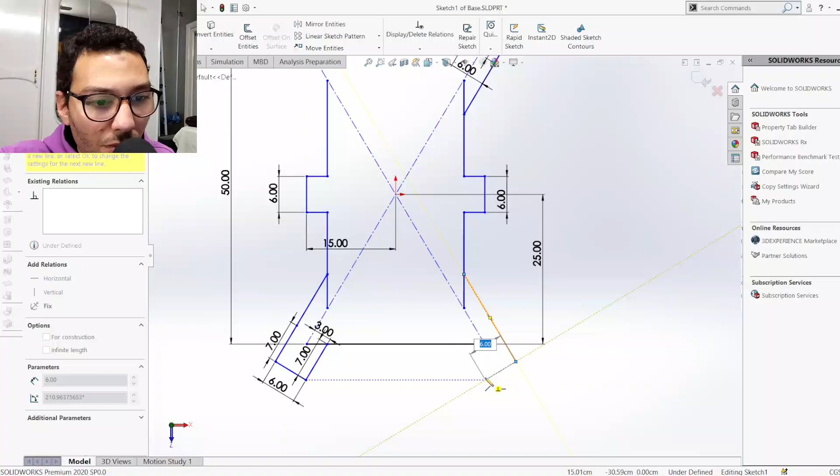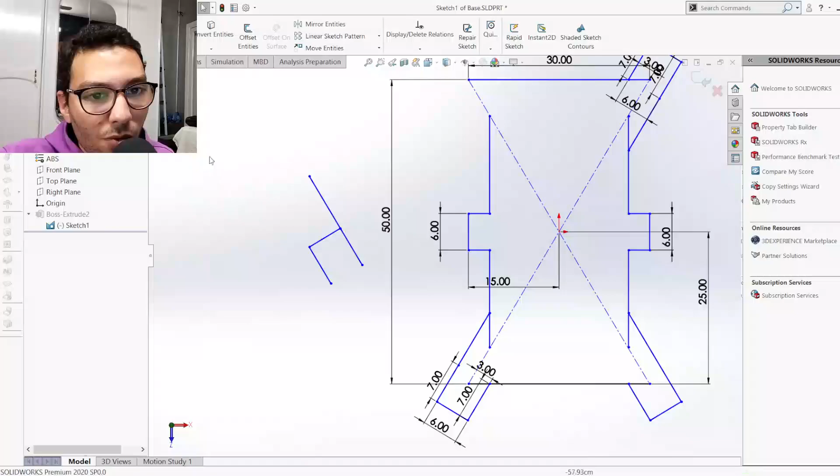Oh yeah, or that. Thank you. We're gonna have that. I think you guys can already see that it's sliding, right?

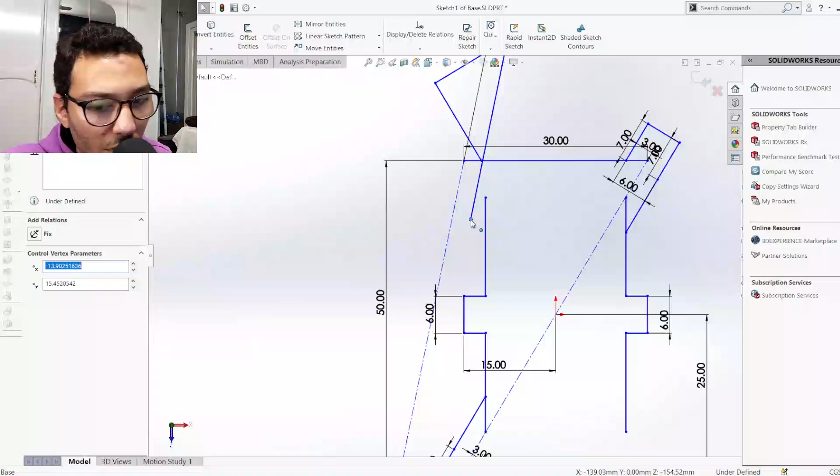Whoop. And this should be 6. Thank you.

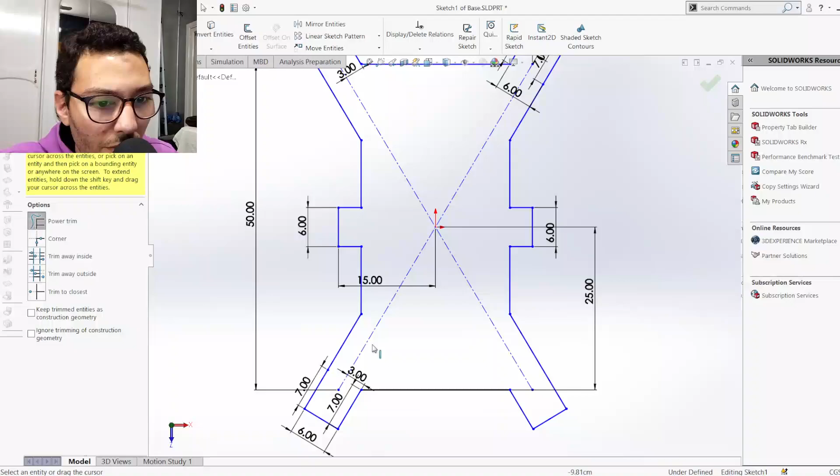Okay. Kinda what I wanna do. Of course, it still has adjustments. This could be rounded, as well as this, and so on. Yeah, it would be a lot better than this, for this to naturally go down here. Huh. Let's do something.

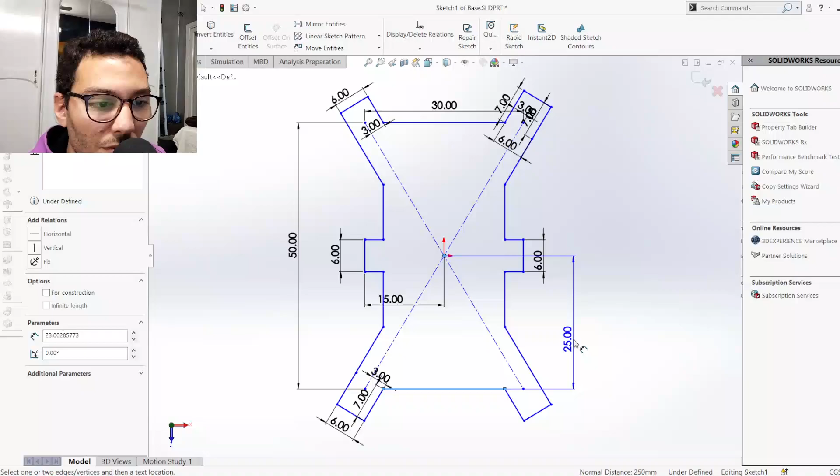What do we want to do? This can go. This can be 20. This can be 40 in that case. Yeah. But let's first undo both.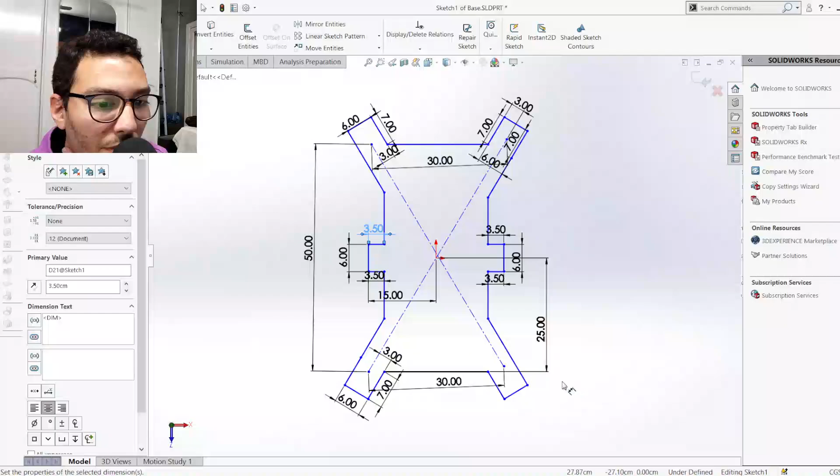Alright. This actually needs to be 7. Let's define everything else so it doesn't move. Yep.

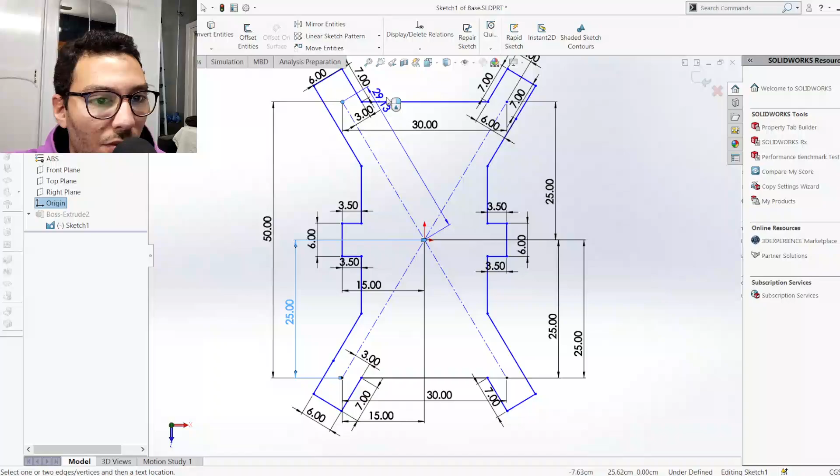Now the question is, why did this move? Hmm. Yeah, it's getting fixed. Nice. I was scared for a sec. Okay. Now that these cannot move, let's see about the rest.

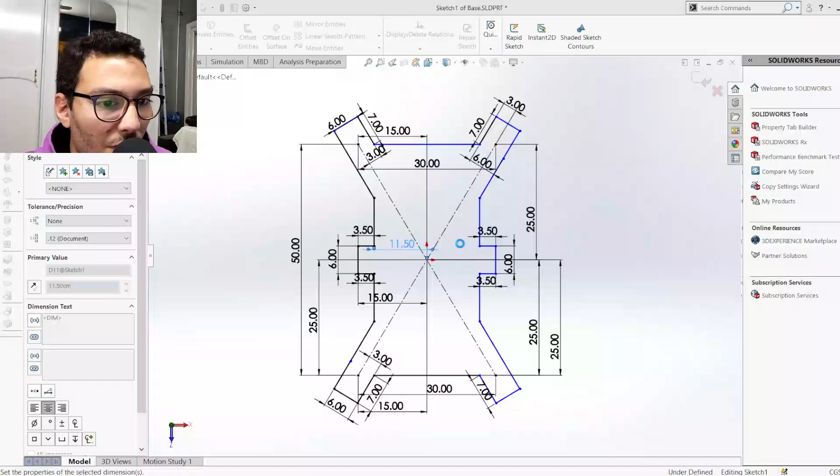Uh-huh. Let's first do that. Okay. Now, let's do something cool. This is gonna be like that. Now, let's do this. Okay, exactly what we wanted.

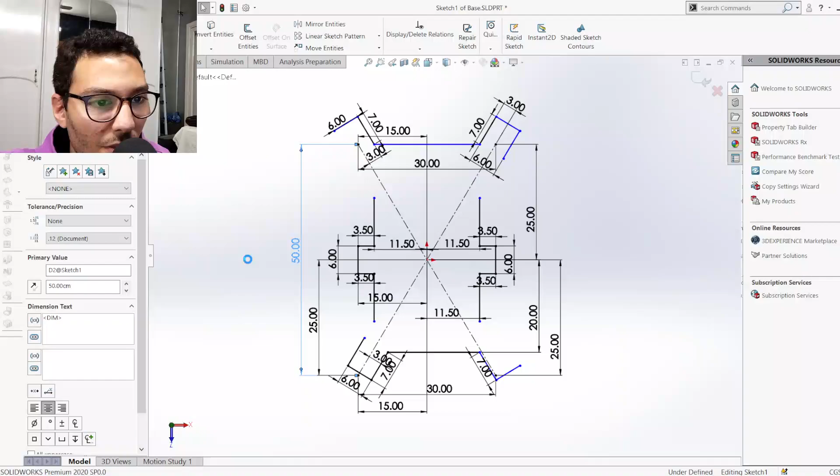And all of this to be 40. Not what we wanted. Okay. Yep. That. Thank you.

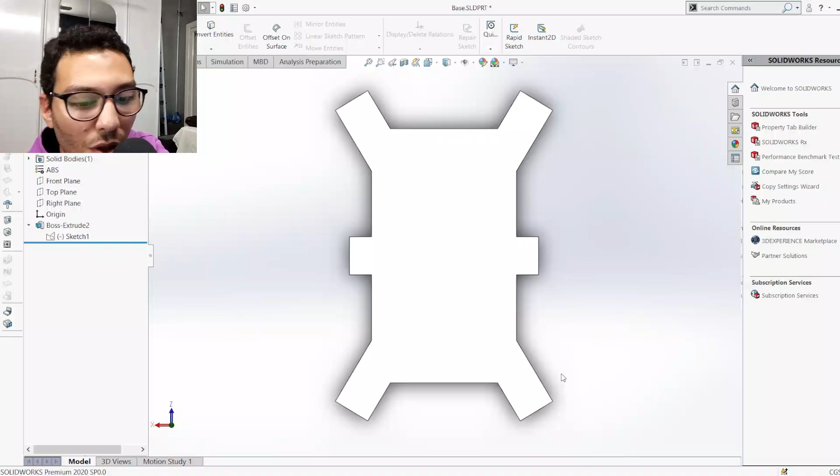Yeah, it's getting a little bit better. This can all just be shifted inside, which is gonna have this to be shorter. But for now, that's actually great. So let's keep that like that. It's gonna mess up our entire assembly, but that's the process. Oh, I see you. Anyway, let's go check out our assembly. We're gonna have so much errors. Yep.

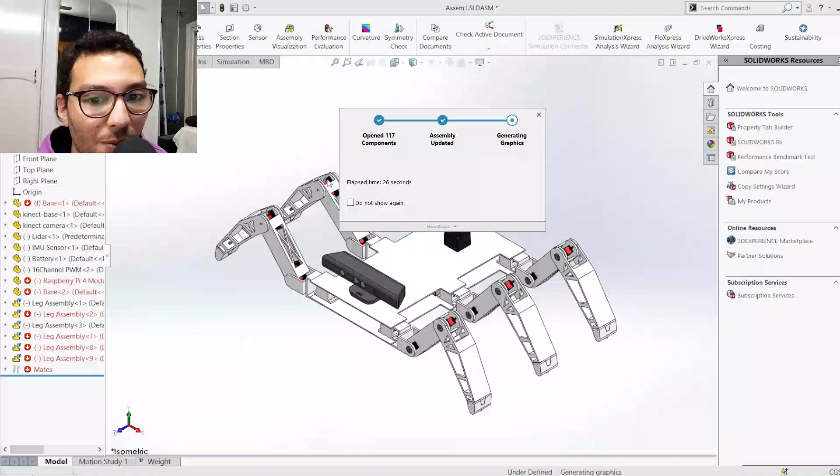Well, since you guys already know how we assemble things and you guys already know how I'm gonna fix this, I'm just gonna remove all of these 4 legs and reassemble them so that they can have better constraints, as well as the camera, the LiDAR, and everything inside, which is this. So you guys already know how I'm gonna fix this.